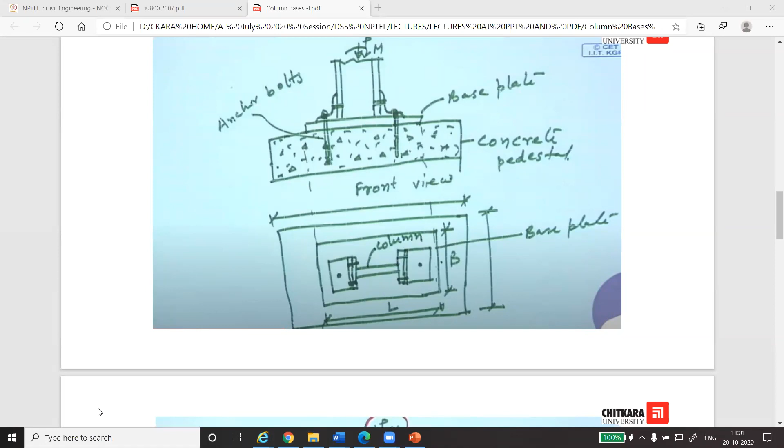So today we shall be starting with a new topic. The topic is already written on this slide. You can read it. What is it? Column base. Column basis. S को खा गए आप? Sorry, sir. Basis, sir.

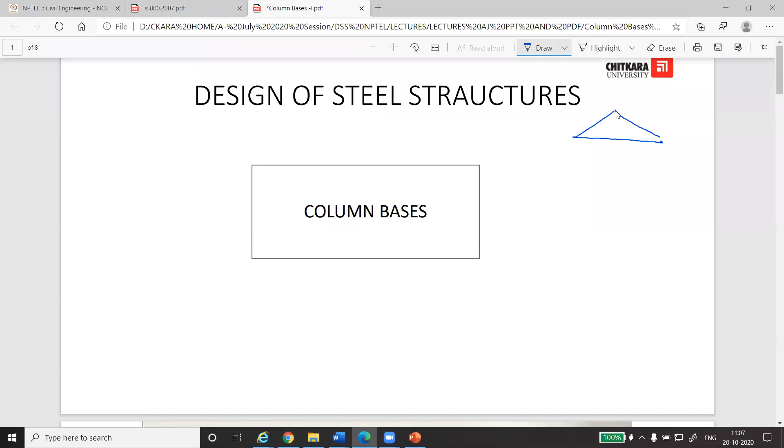So the topic is column bases. I'll show it in the next slide. Whatever load the building has - for example this is a shed, this is the truss, the columns are there, the bracing is there, battening is there, some cross members are there, like this.

So the whole load has to be transferred to the ground. Whatever load is coming on the ground has to be transferred to the soil. The hash line is the symbol - those from diploma will remember this symbol, 2 lines, 3 lines. This is the ground level, this is soil, so this load has to be transferred to the soil.

So whatever structure comes in between, we term it as the foundation, footing, and the name given to it is column base. We use 'bases' in plural because in steel structures, primarily we use this word bases.

So there are primarily two basics - this needs no explanation. The load transfer coming from the top of the building's structure, the member that transfers it down, that is column bases. You know that the whole structure is made up of steel, and there is no mechanism like casting.

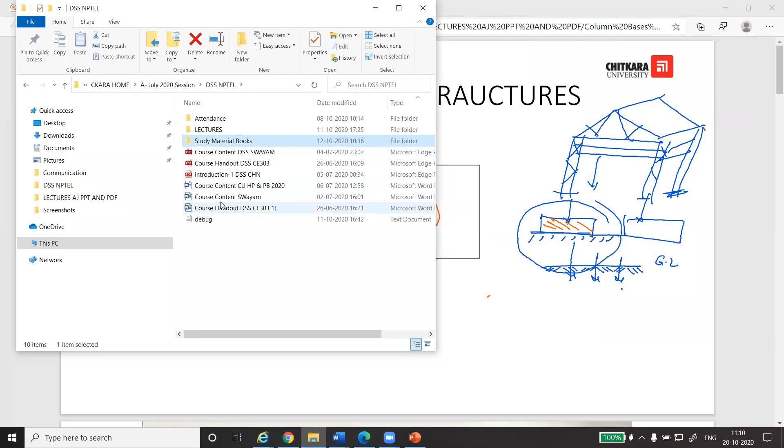This is the course handout, and if you look at this last one, the column base - this topic we are trying to cover, and let's see if we are able to move a little bit ahead as far as the syllabus is concerned. So the topics in between we will do after ST2 - that is design of beams, which is bit lengthy, and then gantry girder which is not that lengthy. So these two topics will be done after ST2.

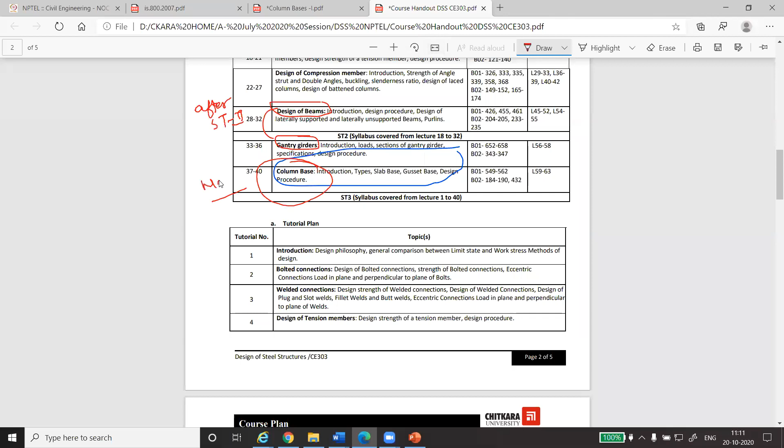So I need to start this now in between, because you have 3-4 days left, then you will be entering into Dussehra, then the ST2. That's why I decided that we shall be shifting to column bases now. So let us move ahead.

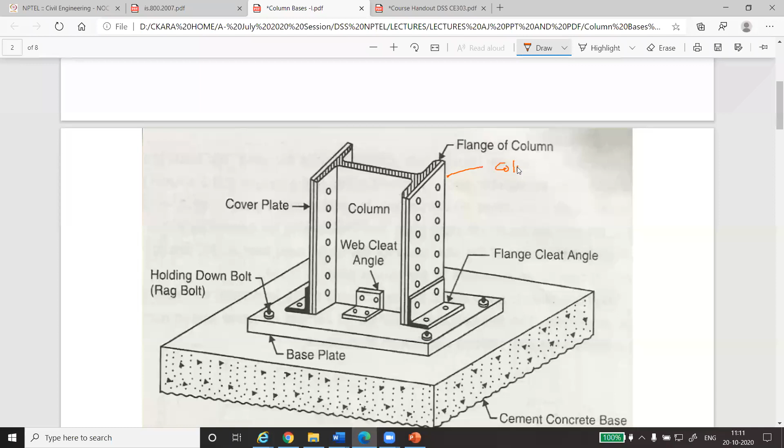Column bases - if you look at this diagram, you can very clearly identify different members and perceive the things. This is the bottommost part of any steel structure. This one is column. You have to be very clear with the diagram as well, as to how it looks from the top and how it looks from the bottom.

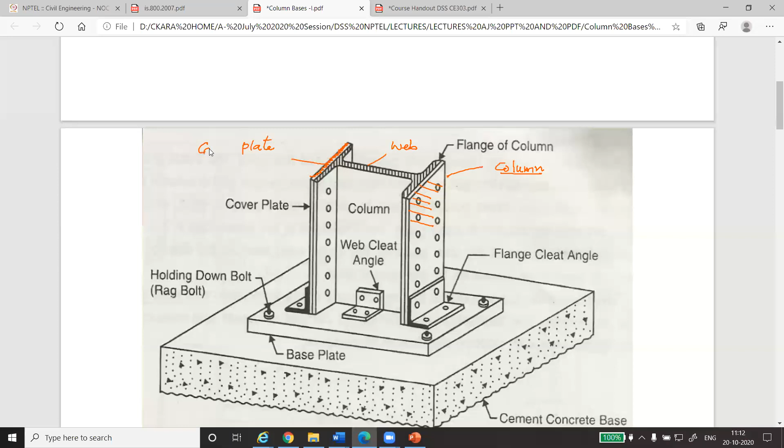And this one is the flange. This is clear to you, this one is web, of the column. And attached on top of the column there is a member - if I shade this one on both sides, this one is plate, and this is generally the cover plate. When we design the column base, this cover plate may or may not be there depending upon the load that has to be transferred to the base.

And of course the load is coming in this direction. This cover plate and the figure which you are seeing right now, it has been prepared with the help of bolts.

And there are additional members. First of all, this is column, prime member, cover plate, right? And the third one is cleat angle.

Cleat angle is of two types. The one which is connected to the flange, this one, this is flange, named as flange cleat angle, and the one which is connected with the web, this is web cleat angle, right? It's very easy to understand, so I hope this is clear.

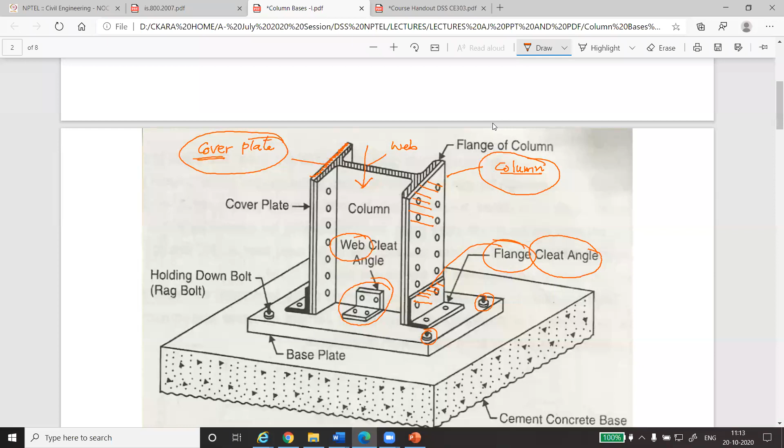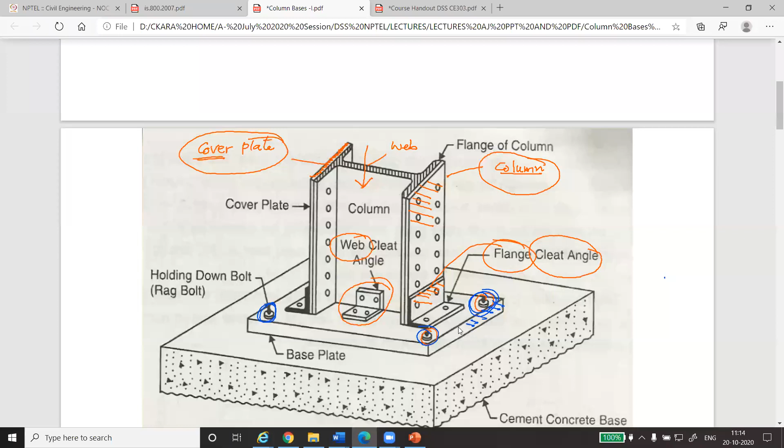And you can see this one. There are 4 bolts here. This is the third one, and the fourth one is on the other corner, right? So this bolt and the plate, which I am marking right now, this one, this blue one, and this is base plate, right?

If you draw the figure in this base plate, now you can identify the members: this column, this cover plate, then cleat angles. Cleat angles are of 2 types. I can mention the word column, different members of the column base. This will be already designed.

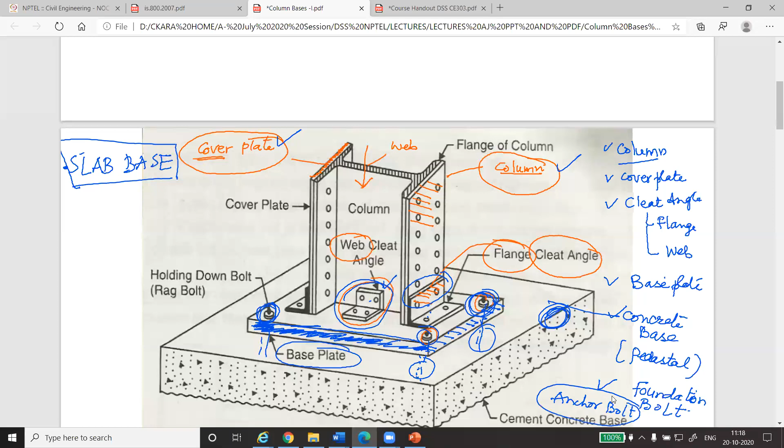We call it anchor bolt. Sometimes we call it foundation bolt, and many times we call it anchor bolt. Anchor means to hold/grip. The steel plate with the column, the base plate with the concrete, whatever is joining them, that is the anchor bolt, right? And also written on the right side, it's rag bolt.

Rag bolt is a type of foundation bolt. There are different types of foundation bolts. Those who have done diploma drawing, foundation drawing, they might be aware that there are different types of bolts, right? It can be like this, inserted into the concrete. It can be like this, inserted into the concrete, right? Or it can be a simple bolt inserted into it.

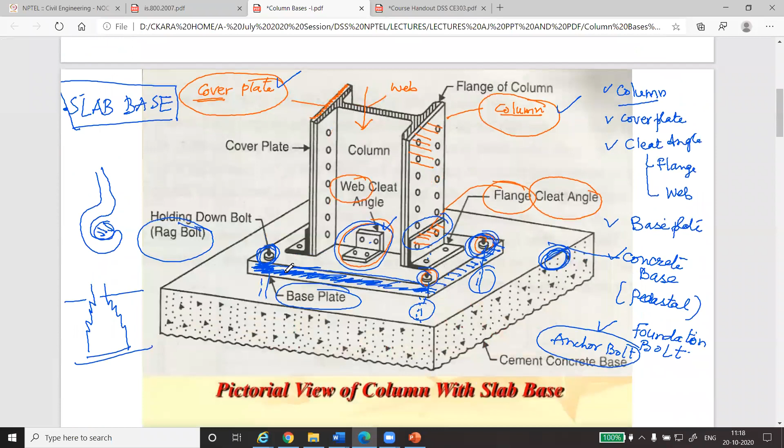But we haven't gone into that detail because we are not focused on that. So anyhow, but these are the anchor bolts. I'm sure all of you are clear with the diagram. Right now, if you see the top view, let me go to the another type of column base.

First is what we have done, this is slab base, and the second type is gusset base. Column base number one is slab base type. Whatever diagram we have seen, the second is gusseted base.

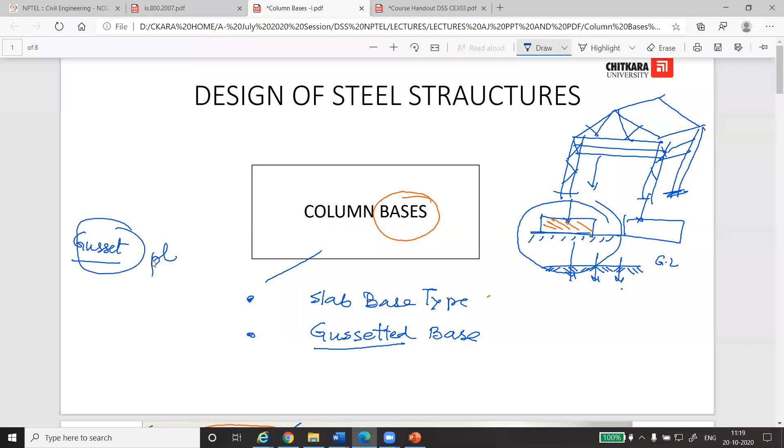Gusset plate you may have heard before. When we provide the connection with the help of a gusset plate. Now where is the gusset plate to be provided? This will be clear in the next diagram. So this is the first diagram.

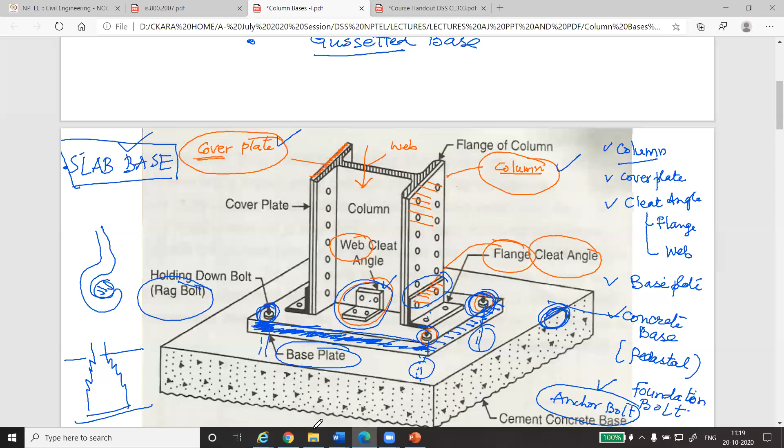If the question is there to draw a neat and clean diagram of slab base type, labeling all the main components, then you have to draw this type of diagram, right? And you have to be very, very clear. If I ask you to draw the front and top view of this diagram, let me open the blank sheet. I'll be drawing it.

अभी इसी कॉलम का एक टॉप व्यू और फ्रंट व्यू ड्रॉ करने की कोशिश करेंगे, राइट? दिस इज द कॉलम.

Let me reduce the thickness of the pen. This is column. This is thickness of the flange of the column, right? And column is ending here. And top का व्यू हम नहीं बना, टॉप से कहाँ से आ रहा है वो उसको हम कट लाइन शो करेंगे. Then below the column is what?

The base plate, right? And this base plate is connected with the column with angles. These are the angles. Sorry, एक मेंबर इसके बीच में और एडिशनल था, that was the cover plate.

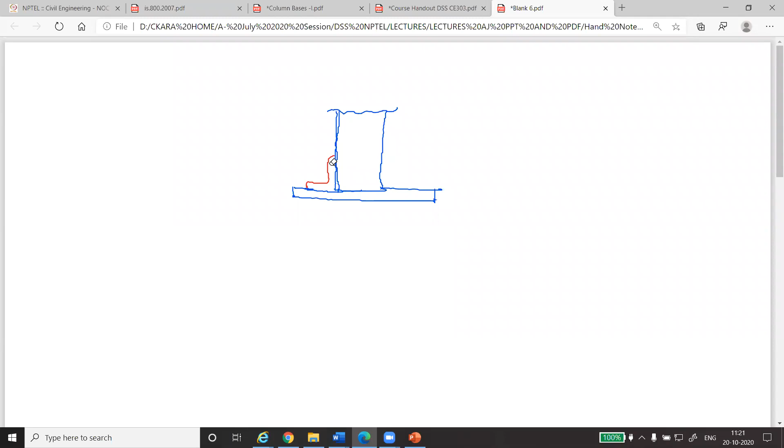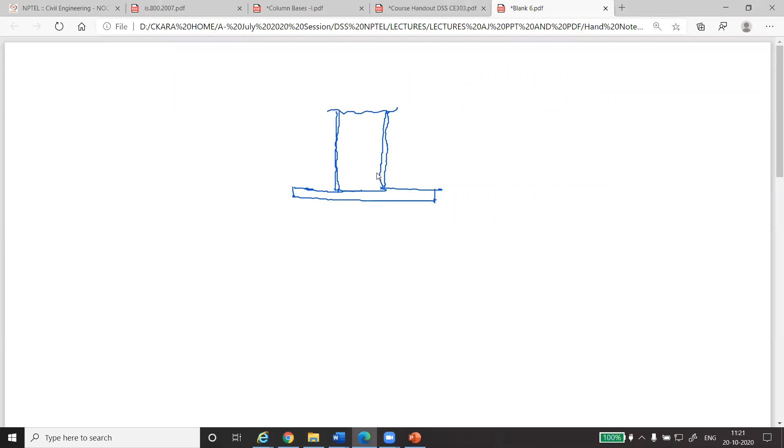This is thickness of the flange of the column. Then there was cover plate. Let me draw in different color. This is cover plate provided on the both sides, right? Then there was angle

connected with the base plate and the cover plate of the column, right? This is flange cleat angle. Then there was an angle connected with the web of the column as well, right?

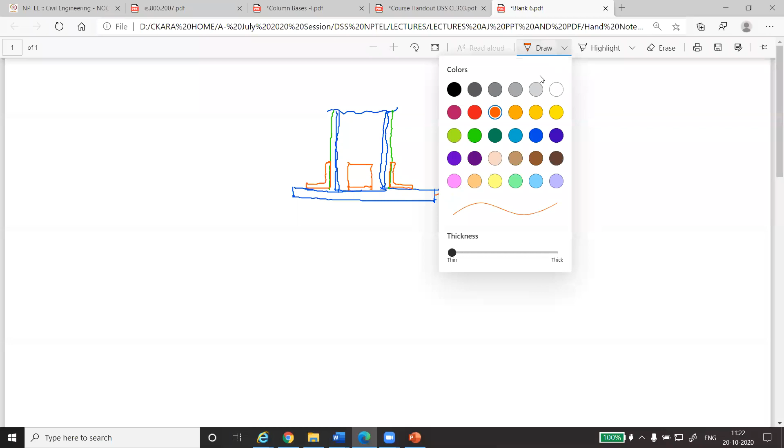Then below this is base plate, and then below the base plate is the foundation. Below the base plate is the concrete foundation. The concrete की dimensions नहीं है, then we draw it as cut line. And then there is anchor bolt. This is anchor bolt.

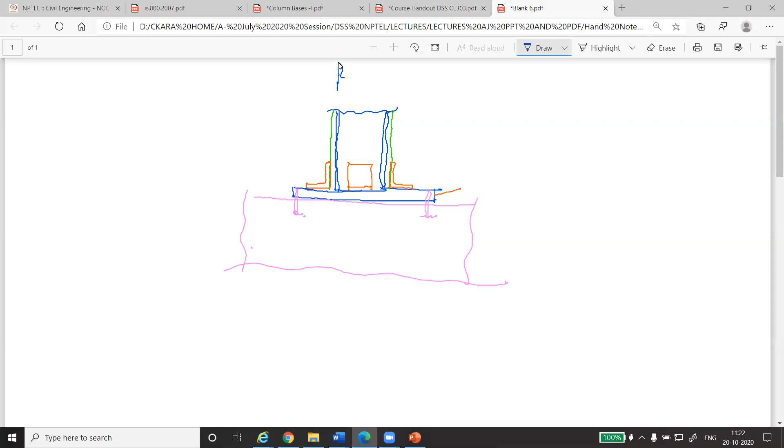And if you draw the top view, is this. This is column. Then the cover plate. Then is the angle.

An angle, flange angle, and the thickness of the angle. This is thickness of the angle. Then this is joined with the help of bolts. तो bolts तो जहाँ पे भी लगे.

This one is concrete. Stylus के साथ draw कर रहा हूँ. That's why the lines are not that straight, but you can easily understand, right? So this is top view, and this one is front. All the label diagrams, all the components are clear out of this.

And then moving on to the second type, and this is the gusseted slab, gusseted column base, right? If you see this diagram, there's a difference. This one is column, it's the same, right?

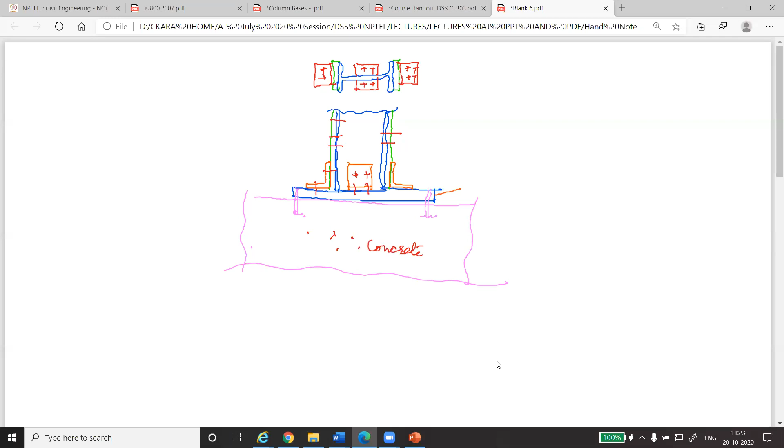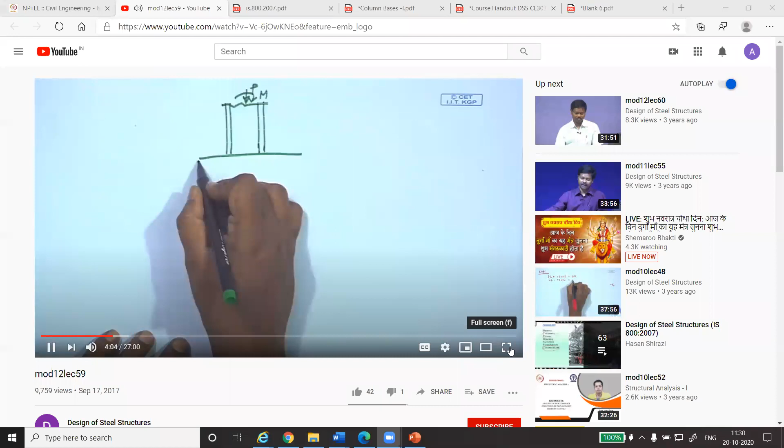Load from the superstructure, say it may transfer load, concentric load, it may transfer some moment as well, and then we provide a base plate of steel material. So this is called base plate, and this base plate is connected with the column with cleat angle.

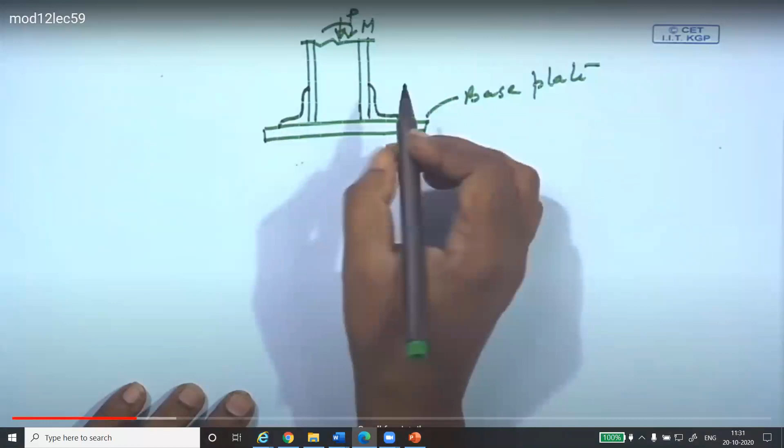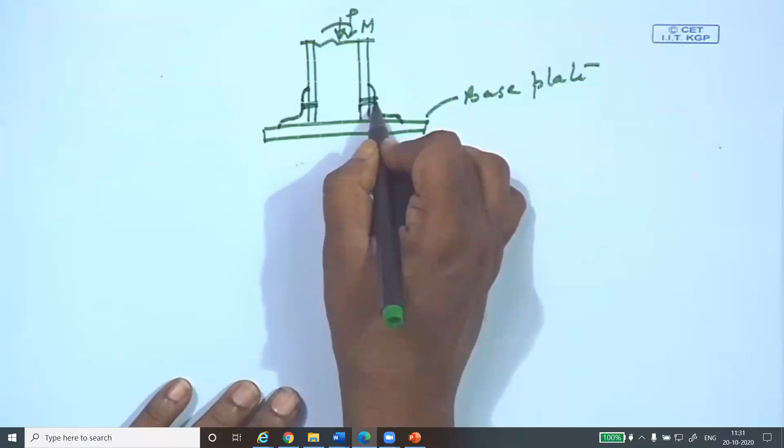Okay. So if it is concentrically loaded, then the minimum number of cleat angles are provided. Minimum number of bolts are provided to connect the cleat angle with the column. Otherwise, we have to design. And here we provide anchor bolts. Okay. Now, below the base plate, the load is again spread to the

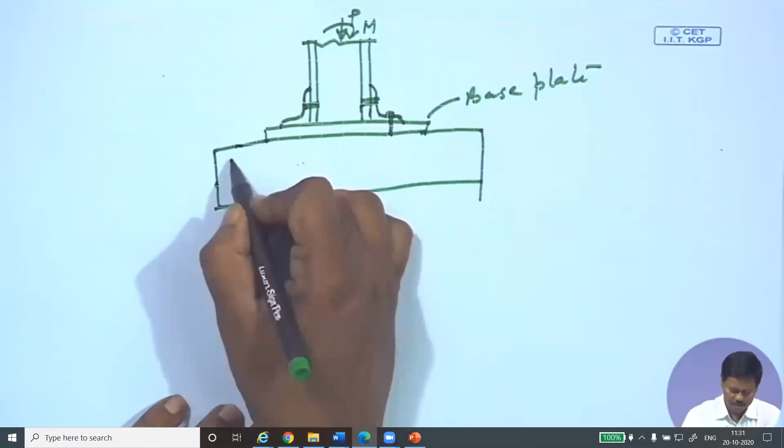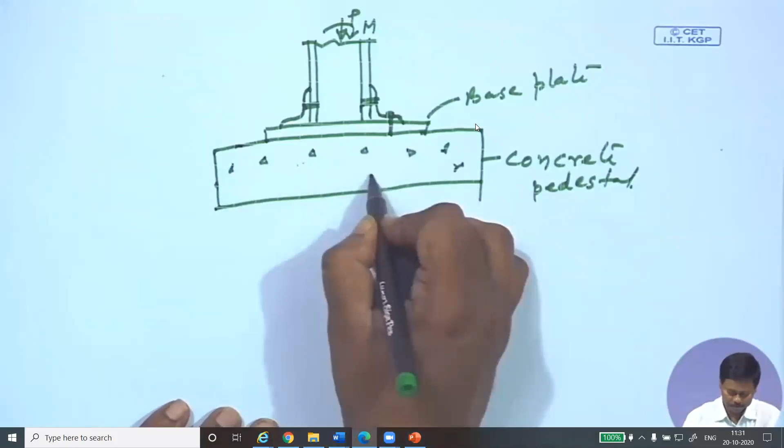concrete base. This is called concrete pedestal. So load coming from base plate is again transferred to the concrete pedestal. This is concrete pedestal. Right. So different grade of concrete may be used depending on the magnitude of load and requirement of the thickness and dimension, requirement of the dimension of the block and dimension of the plate.

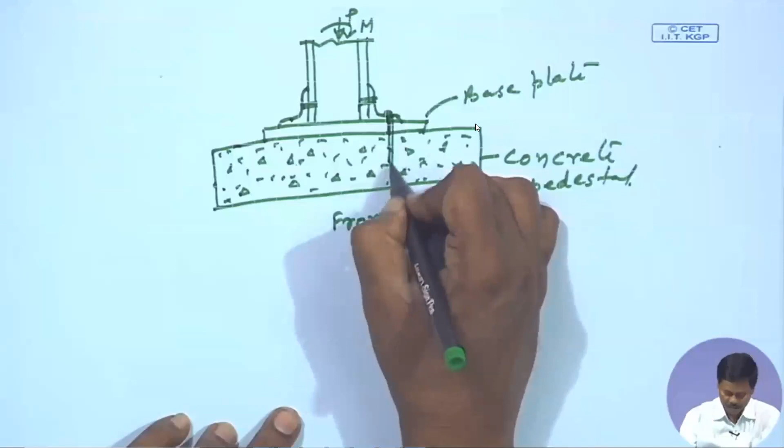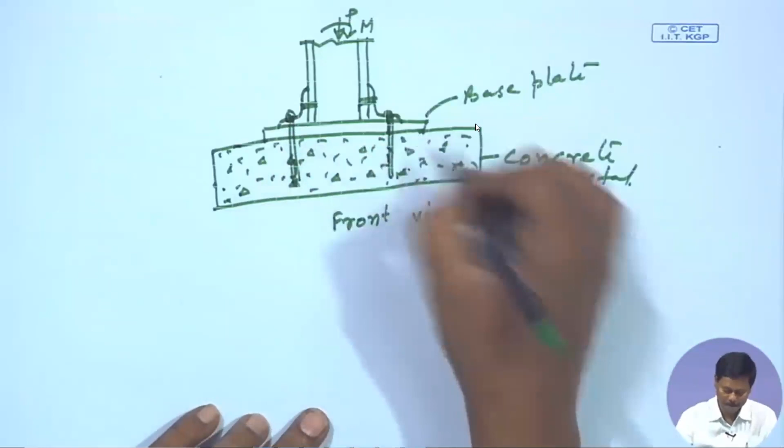So this is, we can say, this is front view. In front view of the slab base, if you see, it will look like this. Anchor bolt will be provided to connect the base plate with the concrete pedestal. This is called anchor bolt. So anchor bolts also will be designed as per the requirement.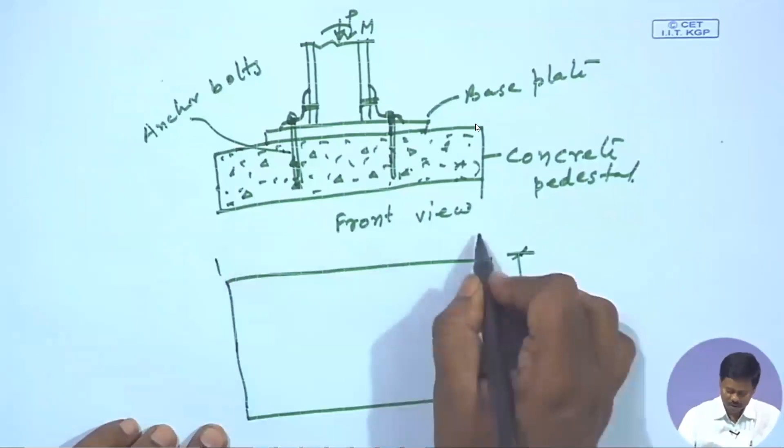And if we see the same in top view, it will look like this. So this is called width of the pedestal, and this is the length of the pedestal, right? And if we see the plan of the base plate, it will be like this. So this is base plate, and this is width of the base plate, and this is length of the base plate, right?

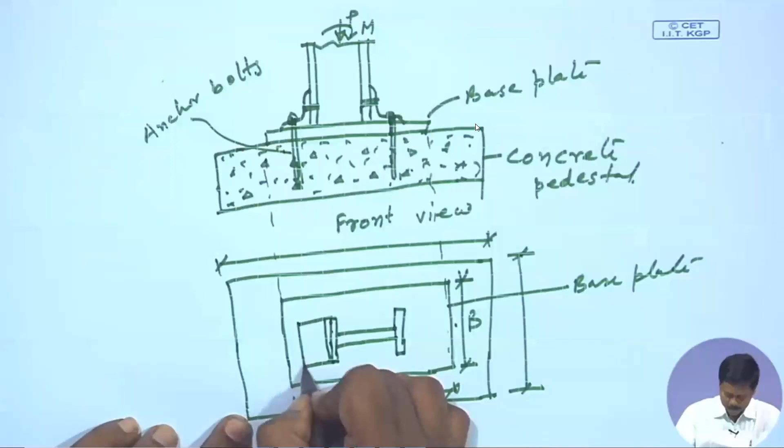Then the column is provided. So for example, these I-section columns, its top view will be looking like this, and column is connected with the cleat angle, right? So we can provide nominal number of cleat angle and bolt which will connect the cleat angle with the column, right? So this is column, and this is top view. So this is the top view of the slab base system, and this is the front view of the slab base system.

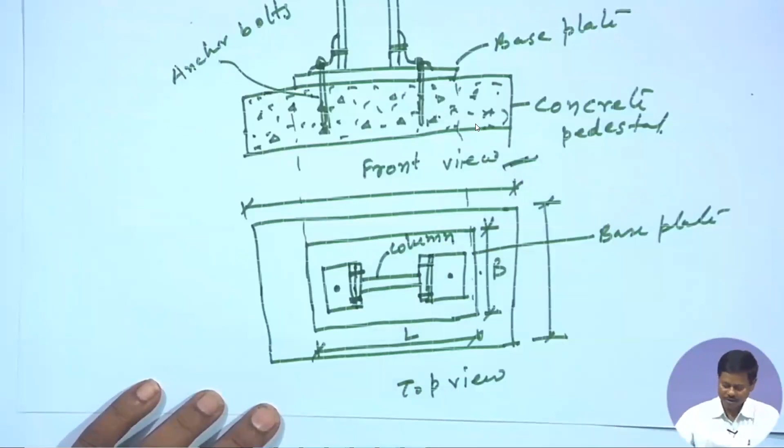So what we need to design is, one is what will be the size of the base plate, that means length, width and thickness. When we design, what are the things that we need to design, right? The column which is transferring the load to the foundation, that shall be already given to you. The load shall be given to you, and the things that we are to design is the size of the base plate, size of the concrete base, if it is provided, the load of the building or the structure which is coming over that, size of the steel plate or the base plate, the number of bolts, the size of the cleat angles, number of angles, these things we need to design, right?

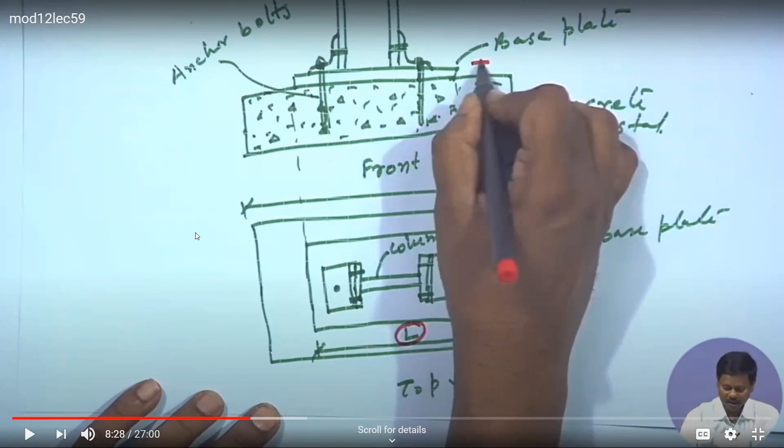When it is coming to the size of the base plate, that is the main design: what size of base plate to keep, what its length is, what its width is, and what its thickness is, right? These three things we mainly have to design. So that is thickness, the process.

Right? So length of the base plate we have to know, and length and width can be found from the grade of concrete, means how much area we need to have of the base plate, so that the load can be transferred to the concrete pedestal without any failure. Means sufficiently it should have, so that the load is transferred from column to the concrete pedestal.

Again, the dimension of the concrete pedestal depends on the soil property. So we need to know the bearing pressure of the soil. So according to that, we have to find out what will be the length and width of the concrete pedestal required.

Because the whole load is to be transferred to the soil, and if we need to design the concrete base, we need to have the bearing capacity, कि soil की bearing capacity कितनी है, soil कितना load ले पा रही है, right? This will be calculated based upon the simple process, that is load upon area, and of course with certain factor.

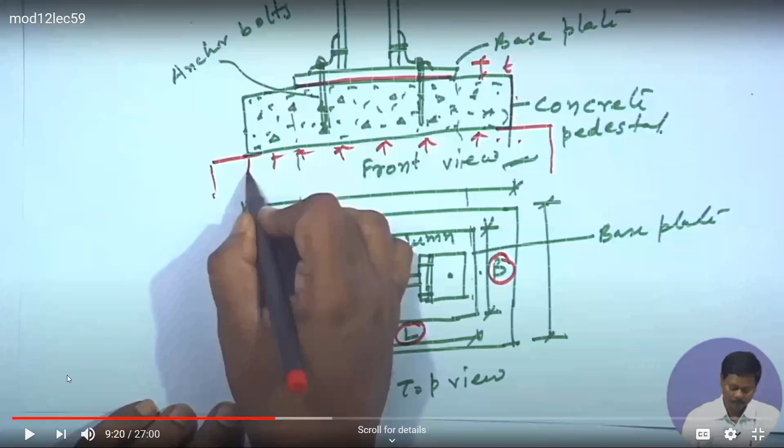So those formulas shall be dictated to you later on, but just as of now, the whole load has to be transferred to the soil, and depending upon the bearing capacity of the soil we design it, so that the load is distributed and transferred to the soil properly. Right. So this is how the system is made, and in this way we have to design the base plate due to this.

Coming back to the subject. So continue with the video. Concentric load and moment. Because of this uniform pressure from the concrete to the base plate, here also uniform pressure will come from the concrete to the base plate because of the concentric load. So the maximum bending moment will be occurring at the face of the column, at the edge. So at the edge, maximum bending moment will occur.

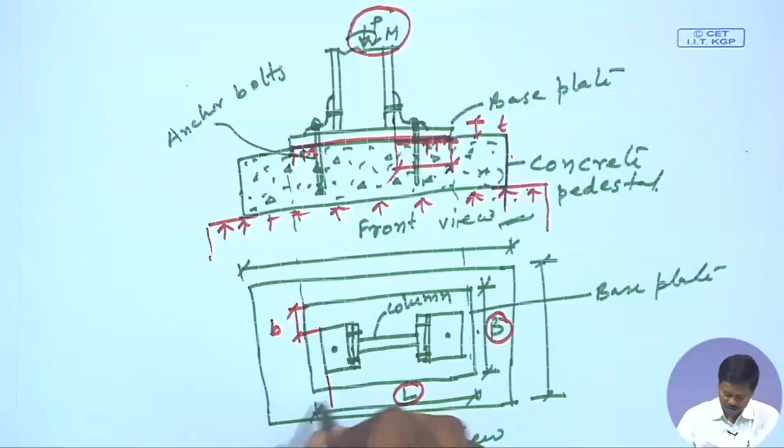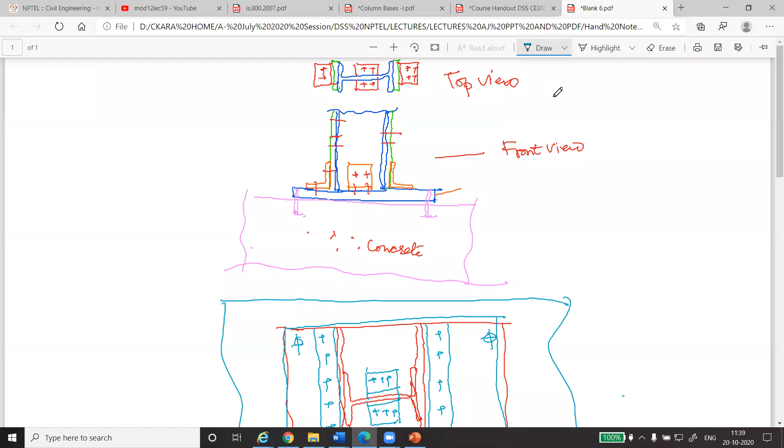So we need to know what will be the projection in both the directions. So in plan we can see the projection from this direction, so we can say B. I'm repeating this step and shifting to the plain sheet, right? So that will make it very clear how we plan and how we take the moment effect when it comes to design of the base plate. So I'm moving to the blank sheet. This is the sheet here.

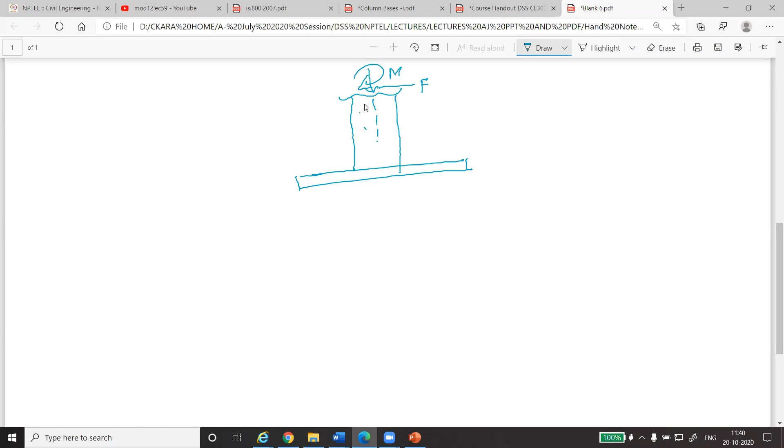If you look at the diagram, the column is coming like this. I'm just making it simple here. I will not be drawing all the components. The column is coming here, right? Below the column is the base plate, right? So the critical section, load is coming like this. This is the moment, and this is the force which is coming directly onto the column. And the base plate, जब इस column को आएगा, this column has the tendency to topple like this or topple like this. And the line I'm drawing in red color is the critical section. This one.

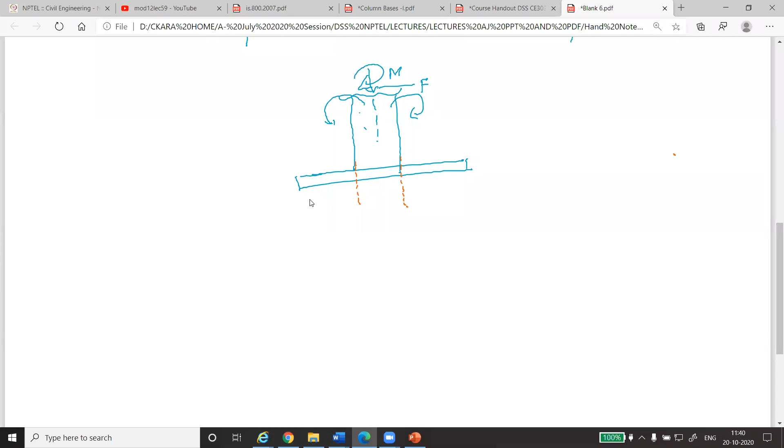Right? And we have to design, because the soil pressure is coming under like this. That is the direction of the soil, and we are to see what is this dimension, right? This dimension is A or B. If you look at the plan, column बीच में is like this. Let me draw it in the center. The column is like this, right? If you look at this diagram on the left hand side, this is the dimension we should be designing, right? And in the same way, in the other direction,

and this is the column, and dimension projecting beyond the column size. So this is A in one direction and B in another direction, right? So this dimension has to be calculated, and this is the pressure which is coming from the soil reaction or the soil pressure, that is W kilonewton or Newton per unit length, right? जैसे हम करते थे ना शुरू में, आपने SOM में किया होगा, that this is the soil pressure which is coming, like this is W per meter length and this is L, right?

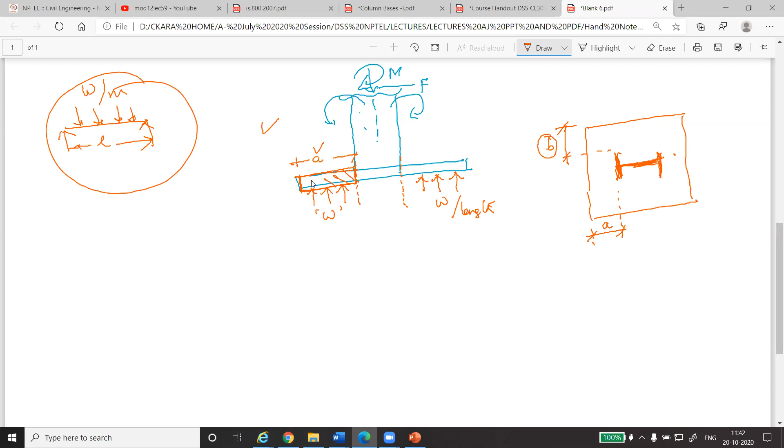So this same process we apply here, and we shall be calculating this A and also calculating B, because in another direction, if this is column, the soil pressure will be like this, and this dimension is B, right? So this is W, this is W. तो इसको explain कर रहे हैं professor. Listen to it, right? So this A and this B we are concerned about. So shifting to the video.

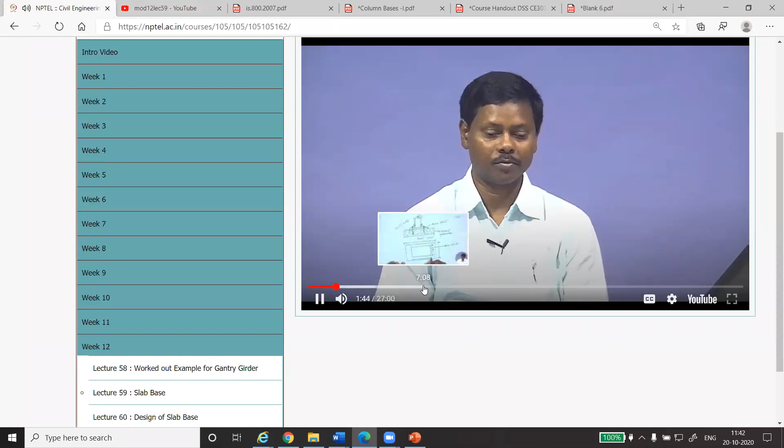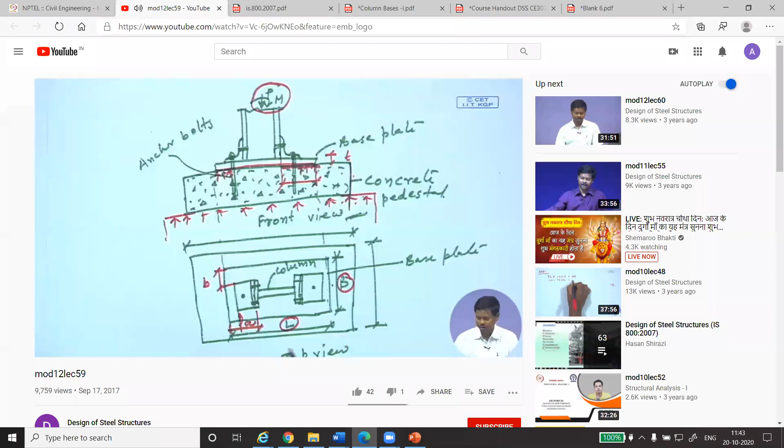To transfer the load from column to foundation. Right. This is complete. In plan we can see that we have to find out its influence, so that we can find out the thickness of the plate around it. So to find out, this end will be, say, A. Okay.

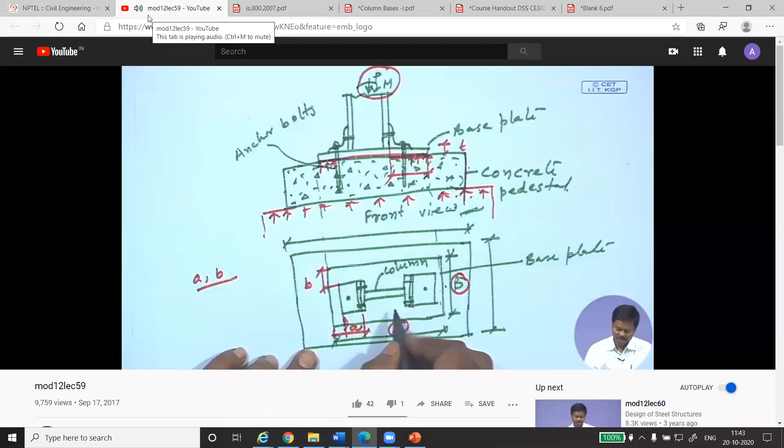So A and B are the projections in both the axes, and because of this projection, the bending stress will develop, bending moment is created, and we have to calculate the bending stress, and then we have to find out its influence, so that we can find out the thickness of the

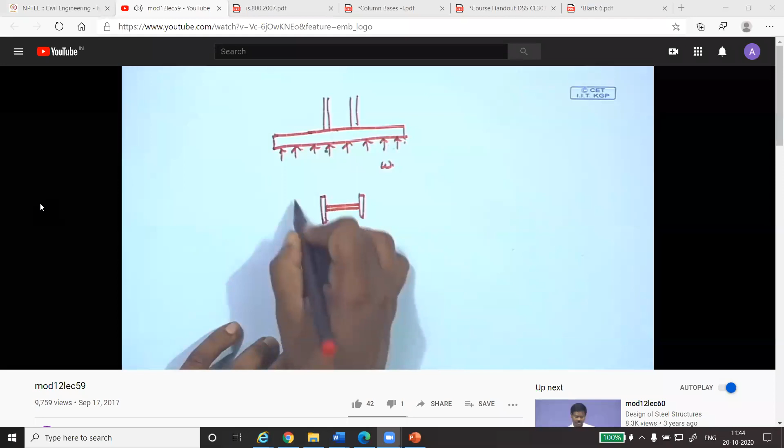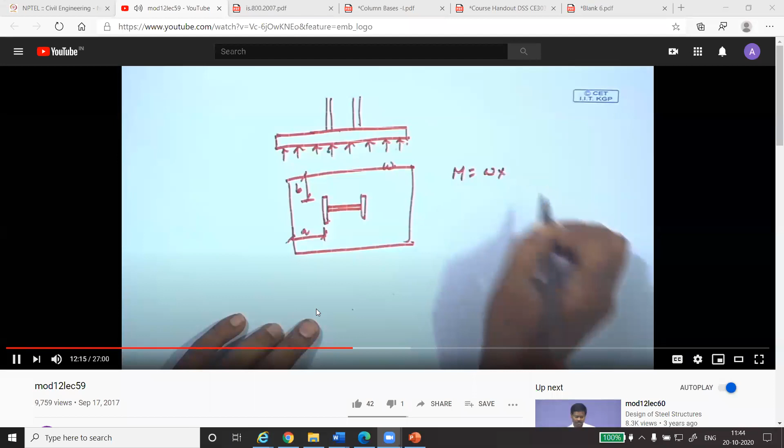and this is B. So maximum bending moment along x-axis will be, we can consider the W. W is the load. Can somebody tell me what is the maximum bending moment of a cantilever beam?

This is the beam, this is the load, right? This length is A, and this load is there. This is W, right? What is the maximum bending moment?

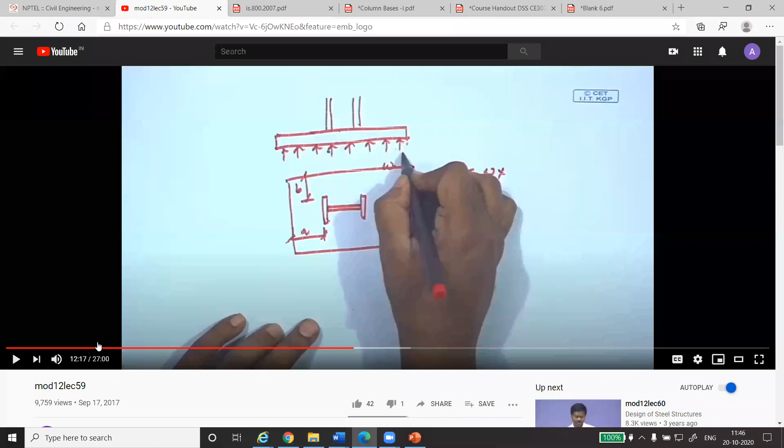So I'll be shifting to the video again. Just watch it. W is the unit pressure from the concrete. Okay, W. So bending moment we can find out: W into 1 into A into A by 2, per unit length.

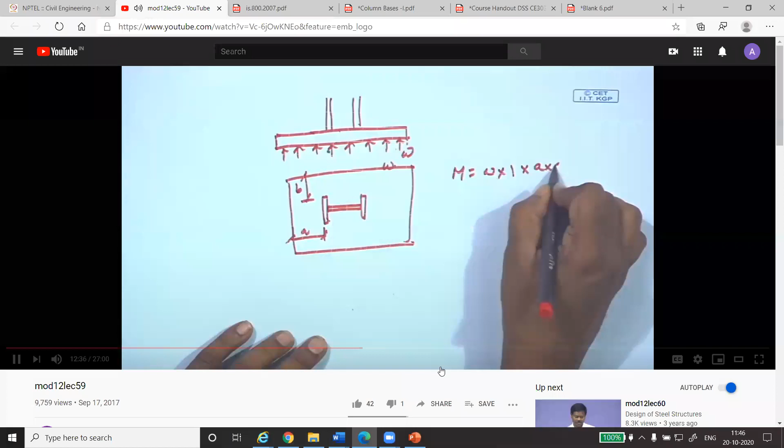So WA square by 2. What is the bending moment in case of a cantilever? Because this one is acting as a cantilever, right? If you look at this diagram, this portion is fixed here, and this beam is a kind of cantilever, and this is the load, right? And this length is A.

So the bending moment at this end will be WA square by 2, sir. WL square by 2. This is WL into L by 2. This is WL square by 2. So this is the same he is explaining now.

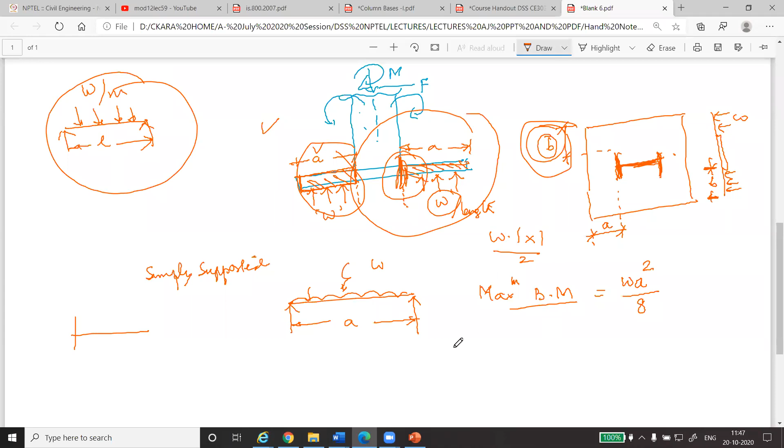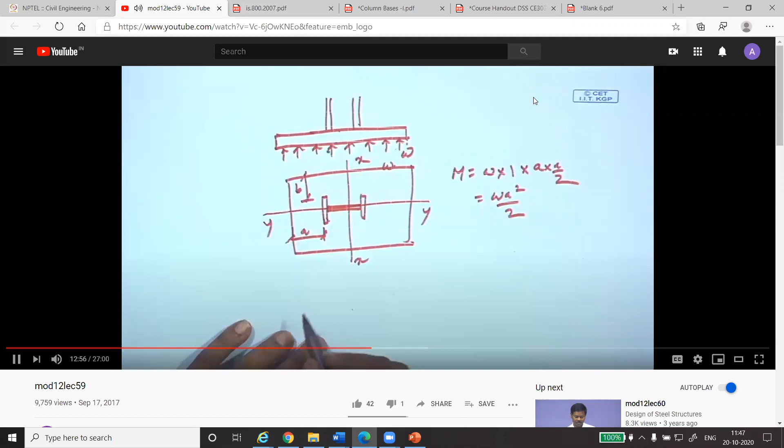So if you consider this is X and this is Y, bending moment is coming along the X axis. This is A, so WA square by 2 along the X axis. And in the other direction, along Y, you can consider M dash is equal to W into 1 into B into B by 2. So WB square by 2.

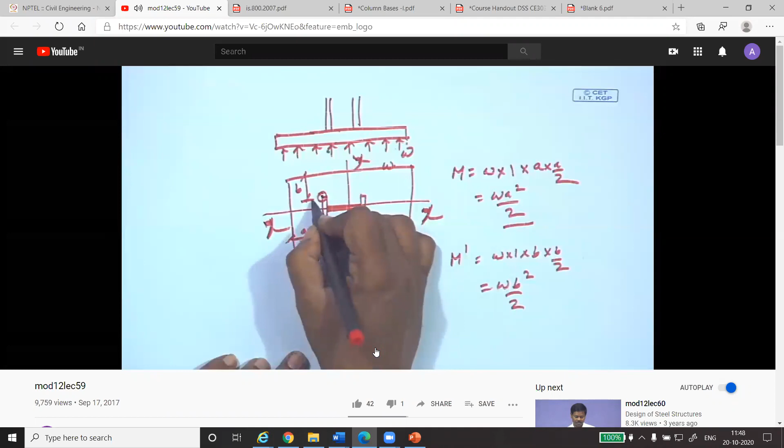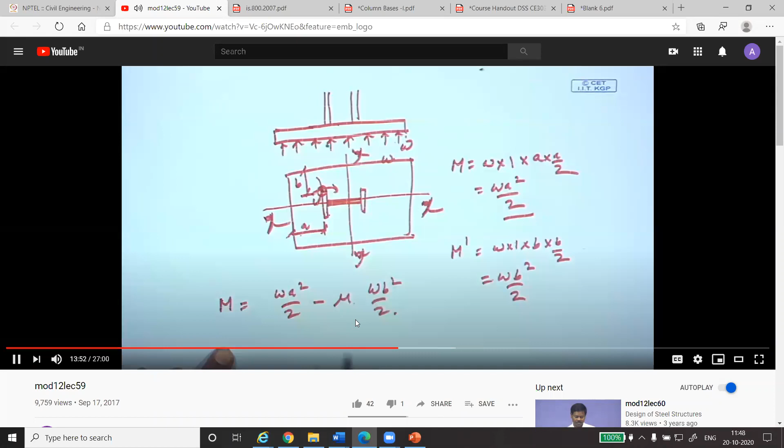So he's applying the same bending process in two directions at this point. So the effective moment in one direction will be WA square by 2 minus mu into WB square by 2, where mu is the Poisson ratio. This is the standard formula which you might have discussed in previous classes.

So effective bending moment: when we are considering the moment in two directions, one in X and another in the perpendicular direction, we consider WA square by 2, and in Y direction WB square by 2. To get the net effect, we use the Poisson's ratio, mu. This is something you need to remember. Maybe you have studied it in one of the previous subjects.

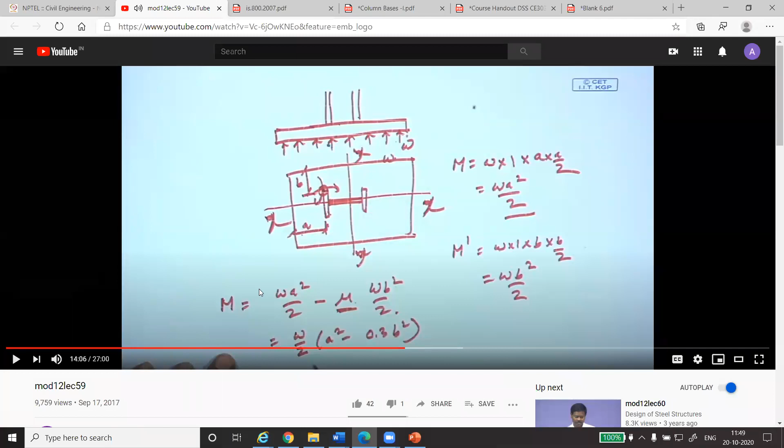For steel, we can consider mu as 0.3. So W by 2 into A square minus 0.3 B square. He's taking mu as 0.3 in case of concrete, right? Because the moment is to be transferred to the concrete. Maximum effective bending moment can be found as W by 2 into A square minus 0.3 B square, where A is the longer projection and B is the shorter projection.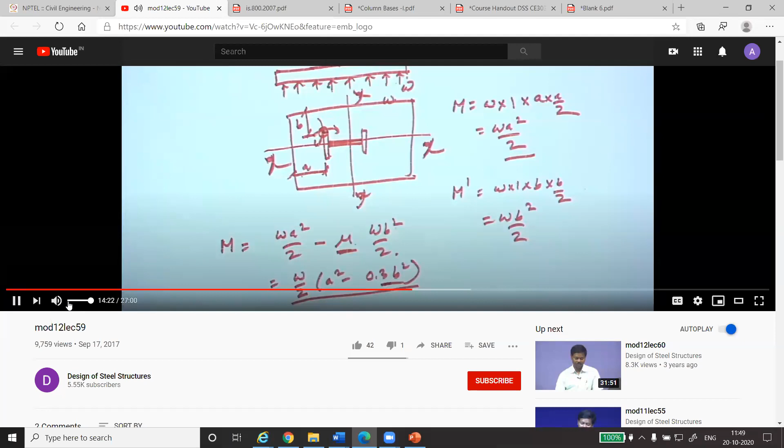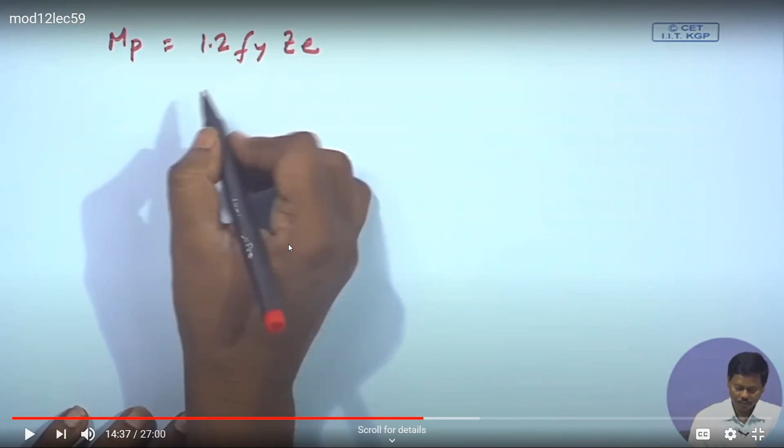Okay. Now the moment capacity of the plate: plastic moment capacity MP will be 1.2 Fy into Ze. This portion you need not remember. I'll be forwarding the video because there is the net result of the whole derivation, which you do not need to remember because the same formula is given in the code. So just try to listen. This is based on plastic analysis, which you have not covered, and you need not cover actually.

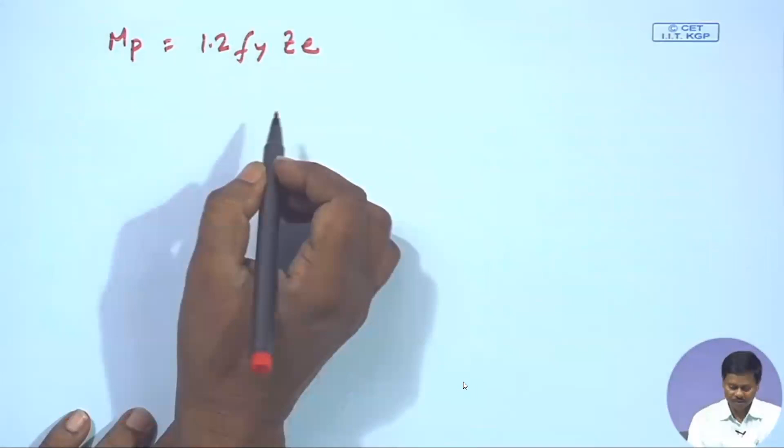So at the end of this slide, Ze is the elastic section modulus of the base plate. I'm just forwarding the video. This is the end result which he has worked out based upon the plastic analysis, right? So this is T. T is the thickness of the base plate.

So I request you to open the IS code; this formula is given in that code, right? Page number, let me see. This IS, yeah, 7. Now you can have a look at this formula.

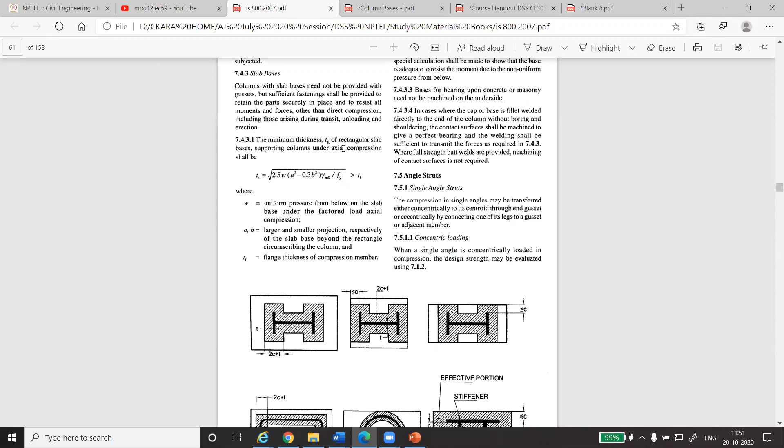This one. Right. That is the thickness of the base plate. This is under the square root 2.5 W within bracket A square minus 0.3 B square, multiplied by gamma m0 divided by Fy, right? This is the same relation which he has derived now. Go to the video, and this is the same relation he has derived, right?

We do not need to derive it because it is given directly in the code, right? So using this formula, we shall be proceeding with the rest of the design. From the requirement of pressure, means the total load, I can find out the bearing pressure of the concrete. Load divided by bearing pressure is equal to area. So from that I can find out the length and width, and also the thickness. So this is how we can find out the dimension of the base plate.

Right. Now we will see what are the steps required to design a base plate. So these are the design steps. Listen another 10 minutes. First, we assume a suitable grade of concrete, means what grade of concrete is going to be considered. And we are assuming that the pressure is distributed uniformly. Because of load, the pressure from the concrete is coming uniform at the bottom of the plate.

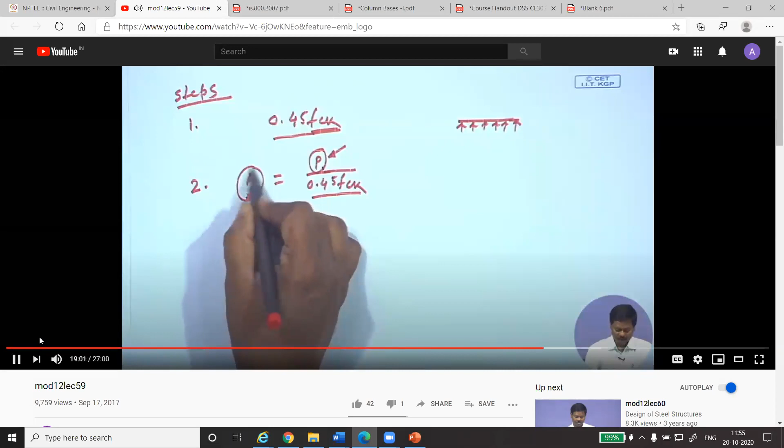0.45 FCK is the bearing strength and P is the total concentrated load on the column. So the base plate area we can find out from this. Remember this P is the factored axial load, so we have to multiply with the factor to find the P value. After getting the required area, we can find out the size of the base plate, means L and B. Either we can provide a square base plate, or a certain length and breadth ratio.

For economy, as far as possible, we need to keep the projection A and B equal. Why? Suppose this is a base plate and this is the column. If projections A and B are different, then along the larger projection the maximum moment will occur. So moment will be more along the larger projection. However, if we consider projections equal, then what we can find out?

Then the projection we can make a little less, and also when we find the thickness there is a term a square minus 0.3 b square. So if we try to keep a and b as equal as possible, it will become minimum. So for economy, we will try to keep the projection lengths a and b equal as much as possible.

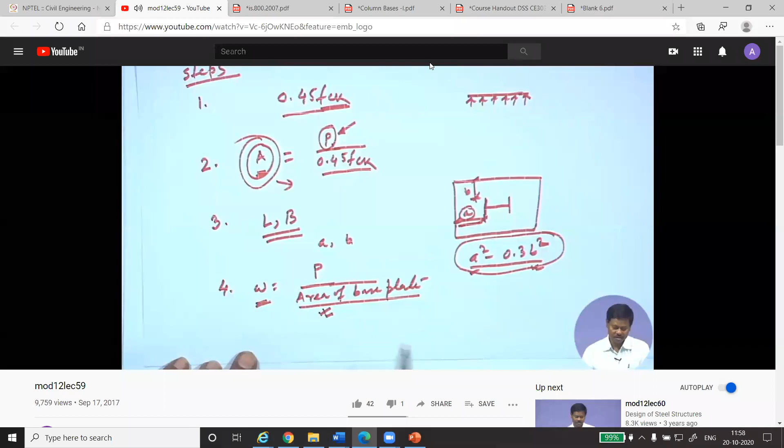Area of base plate. So this area of base plate is different from this, because this is the required area and this is what we are going to provide, which will be a little higher, and this we are providing with consideration of a certain length and breadth of base plate, right? So from that we can find out the intensity of pressure from the concrete pedestal. So in step 4 we could find out the intensity of pressure on the basis of an assumed value of L and B. So L and B is determined.

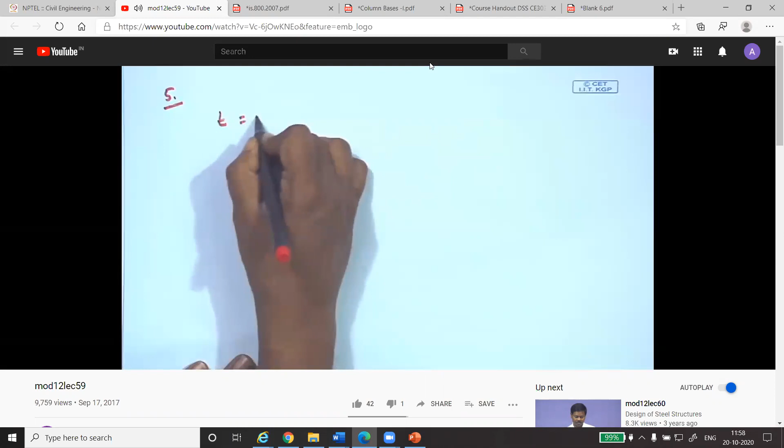Now in step 5 we can find out the minimum thickness required. So minimum thickness will be found from the formula we derived earlier, that is 2.5 W (a square minus 0.3 b square). Practically, it's a very simple process. You take this test, get the area, provide the area, work out the intensity, and accordingly you find the thickness as per the IS code, which is the formula written on the screen right now, 2.5 W within bracket a square minus 0.3 b square, into gamma m0 by fy, right? So minimum thickness required of the base plate can be found from this formula, which is given in clause 7.4.3.1 of IS 800 2007.

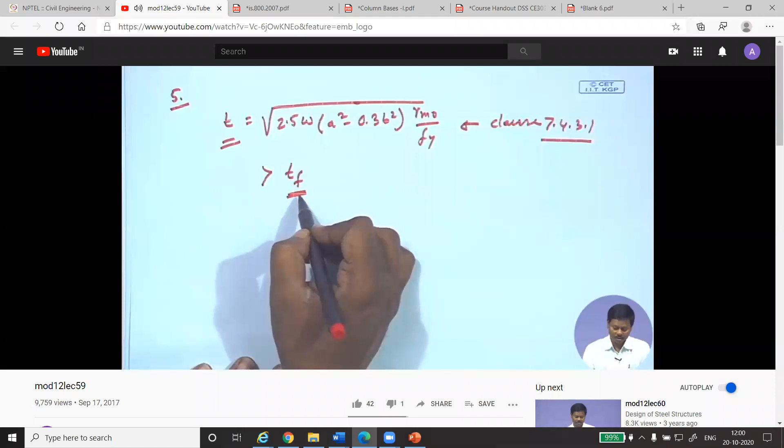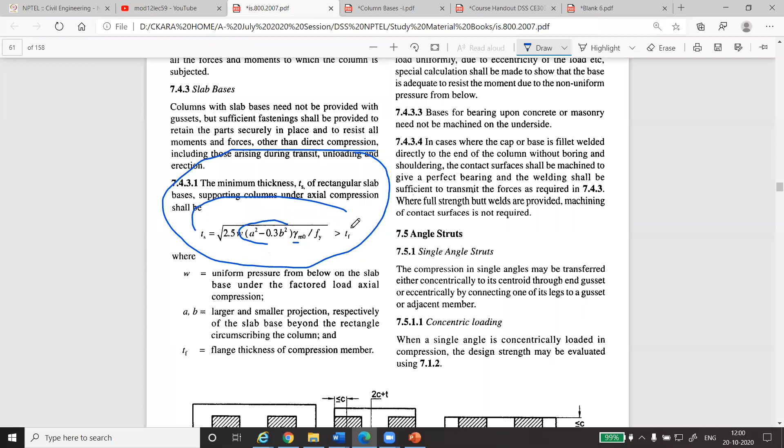So in clause 7.4.3.1, the minimum thickness of the base plate is found, and it has to be greater than the thickness of the flange of the compression member. So the thickness of the base plate at least has to be greater than the thickness of flange of the compression member. That also we need to check. This is written in the code. So if you look at the code, this is the formula, right? It has to be greater than tf, where tf is the flange thickness of the compression member.

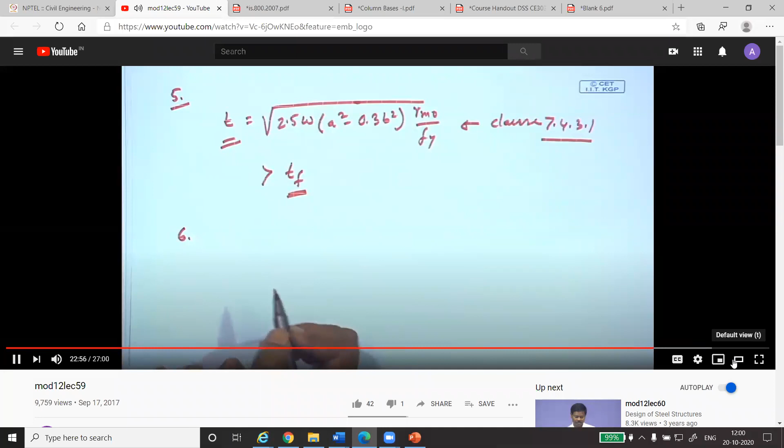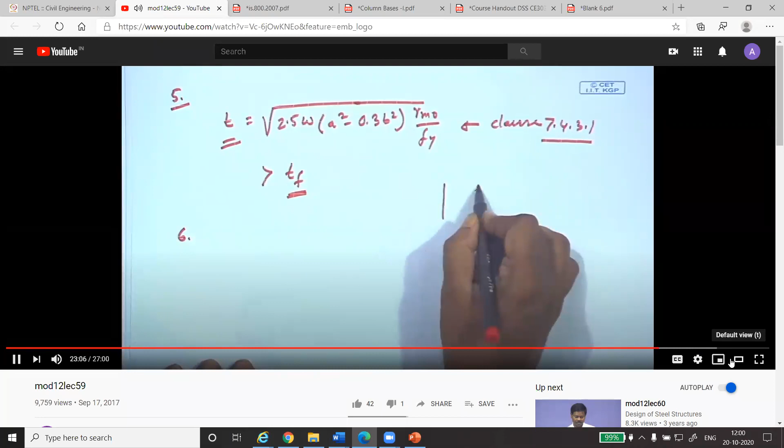Right. Then in step 6, we can provide 2 to 4 nominal bolts for holding down the cleat angles. So the column is rested upon the base plate. Now we'll provide a cleat angle. In case of concentric force, the nominal angle size will be provided, and to hold that we'll provide a nominal number of bolts, that is 2 to 4 of 20 mm diameter bolts.

Okay, and if we provide the weld, then in step 7 we can find out the weld length connecting the base plate with the column. For example, if the column is connected with the base plate, then we will find out what is the available weld length and what will be the required weld length. So from that we can find out the size of the weld. If we are providing the welded connection, then we do not need to go for the bolts, right? So then we have to design the welded connection, the weld and other things. Now one can find out the details.

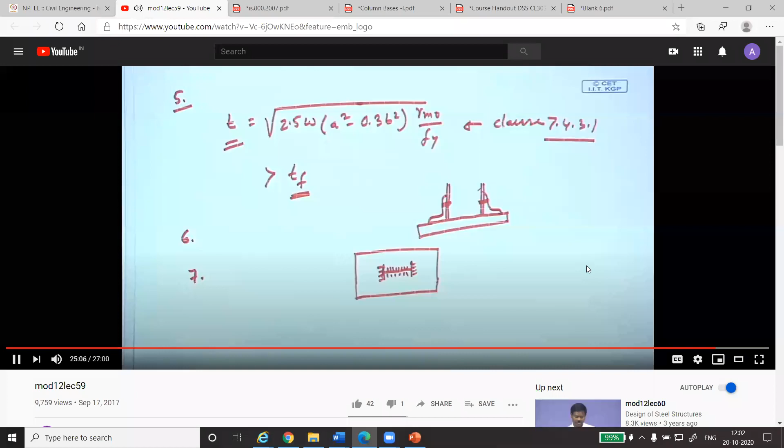Right. So in short, the load from the superstructure is coming to the soil through the substructure, which is made of base plate and the concrete pedestal. Now, the dimension of the concrete pedestal will be decided on the basis of the soil bearing nature. Similarly, the length and breadth of the base plate will be decided on the basis of bearing strength of the concrete. So depending on what grade of concrete we are going to provide, we will find out the length and breadth of base plate.

So this is all for today. Whatever has been discussed today, we shall try to apply and solve one example designing the foundation of a steel column, right? So tomorrow we shall be applying all this; it is very simple. There are only 2 or 3 formulas, and the process is very simple. So the basic formula and basic design process were explained today. So we shall do one numerical tomorrow, right?